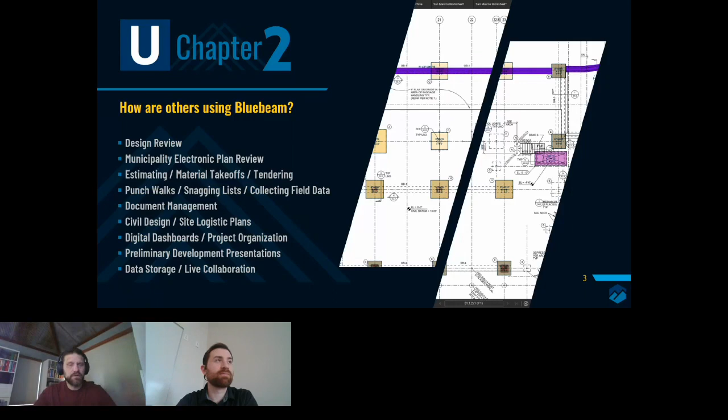To start out, I'm going to start real basic, and then I'm going to show you some cool stuff here. I've just got a floor plan open. A couple of the things that I like to point out in my training are the preferences. When we go into the general section, I always tell my users to enter their first and last name in the user field, because this is going to show up in the markups list with you as the author of those markups. It's nice to know who's doing which markups, especially in a collaborative workflow. It also shows up in dynamic stamps, so the stamp might be built so that when you place it, it actually puts your username and the date that you placed it. That's one thing I like to point out to people.

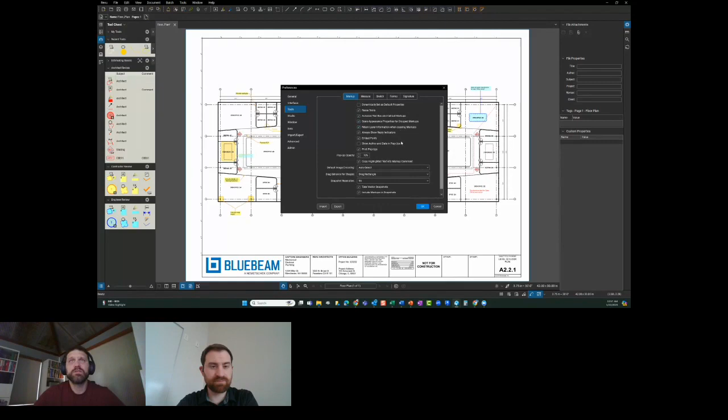Another one in the tools section, markups at the top. The third one down says auto size text box and call out markups. I turn this on with the checkbox. What this does is when you make a text box, typically it's too big, you type your text, and then have to resize it when done. This will actually resize it automatically, so you save a click and a drag every single time you place a note. I'll show you that when we get to the markup tools. I'm going to click OK.

We're going to zoom into the upper corner and show you a couple of the markup tools, starting with the text box. You guys have all done this, I know this is review for a lot of you. Click and drag, it's going to flash asking you to type in your text. I get pretty creative with mine.

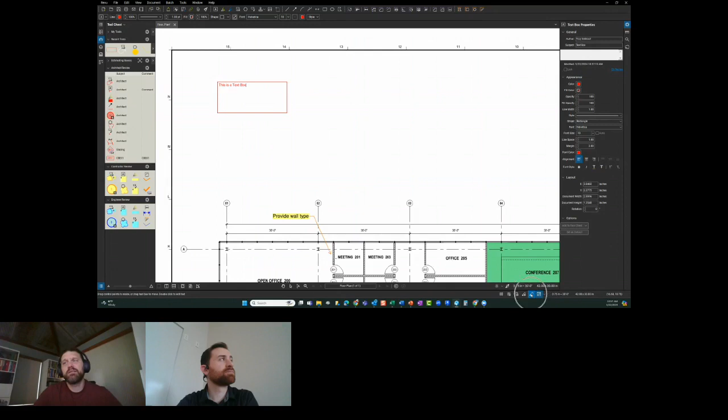What's going to happen when I click out of here, a couple things. It's going to shrink the box automatically to fit the text because of that preference I updated. Also, because on the status bar I have my reuse markup tool turned on, it's going to start my next text box. So you can see both of those happened. I'm going to hit escape to cancel that command, and now you can see that box automatically shrunk to fit the text.

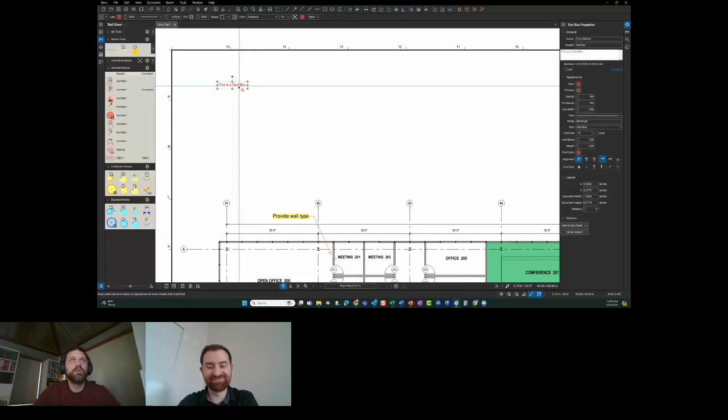Now when you open Bluebeam for the first time and do your text box, it actually doesn't have a box. I don't know why they built it that way, I think they thought it'd be funny to deliver half of what the tool's called. So all you need to do is select it, come into the properties, the little gearbox, check your line width and bump that up to 1 or whatever thickness you want so you can see that box. Now go to the bottom of the properties and click on set as default so that from now on you'll have that box on your text box.

So any of the markup tools, measurement tools, any of that, you can change what it looks like here in the properties and set that as your default. It just works that way every time, you don't have to update your markups every single time.

Couple tips here. If I select this and hold down my control key, I can click and drag and it'll make a copy wherever I drop that. So control key makes those copies. Another tip - I used to switch over to the arrow here to be able to draw a window and select things. You actually don't have to do that. If you hold down your right mouse button instead of your left, it'll draw that selection window, just like AutoCAD.

If you go left to right, you'll get everything that's inside of that box. So if you look carefully, I'm only going to get 3 of these in the middle. If I go from the right to the left, it's going to grab whatever I cross. So you don't have to switch over to that arrow.

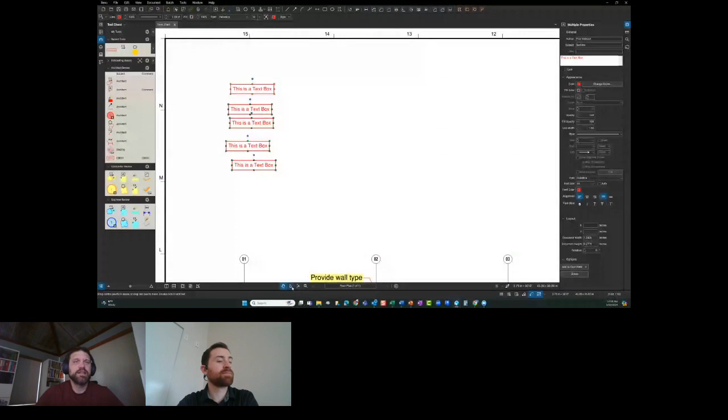Once I have those selected, I can right click, go to alignment, and align left, center, right. I'm going to go left. And then also I can come into alignment and distribute vertically. So I can start to clean these up, make things look nice for a presentation, or maybe you have an engineer that's particular about how things are laid out - I've worked with plenty of those. You can make it nice and clean. So that's our text box.

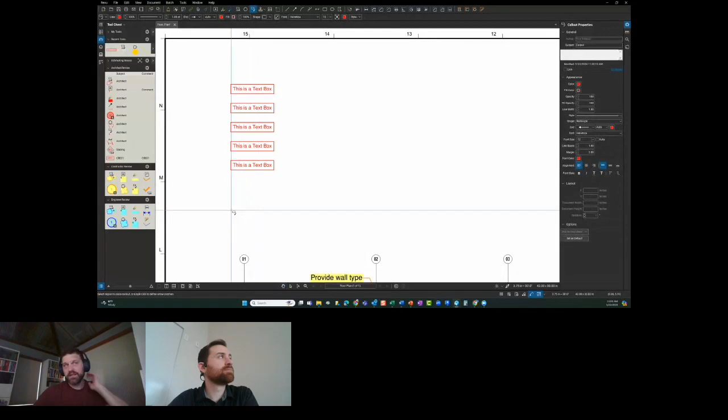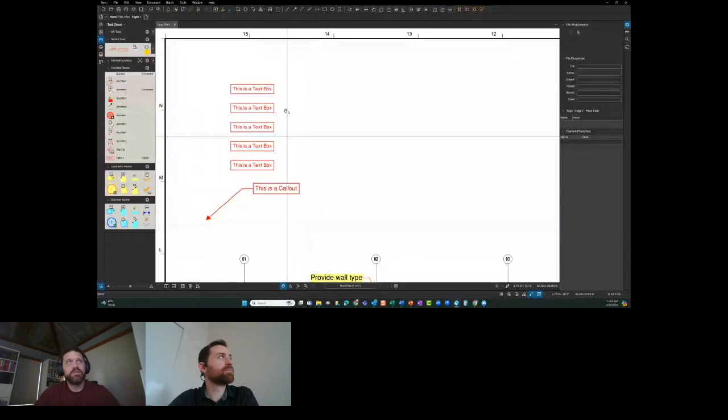Next one, I'm going to do the call out. This is just a checkbox or a text box with an arrow. So you're going to point to something, and then the second click is where you want your note. Again, type in your note. And when I click off of it, it's going to shrink that box again and start a new one. I'm going to hit escape again, so you can see how we're saving time with that box shrinking automatically.

With the call out, I always like to use these instead of text boxes and separate arrows because they stay connected. If I want this note to point to several different places, I just right click, add a leader. I can add as many as I want and they stay connected. So I don't have to draw a separate arrow and try to grab onto that elbow, line it up, and pray nothing ever moves. Now when you want to remove any of these, you just hold down your shift key and click on the tip of the arrow you want to remove. So it's super simple to add or remove as many as you want.

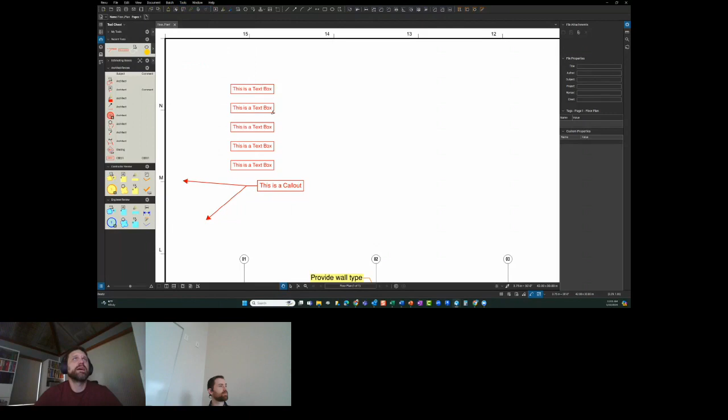Some other ones, the highlight. If I come down here, you'll notice that the highlighter is actually more sophisticated than you would think. When I'm out here in the open, it looks like the tip of a highlighter. As soon as I get close to any text, it changes to a text selector, and I can drag over that and highlight the text that way.

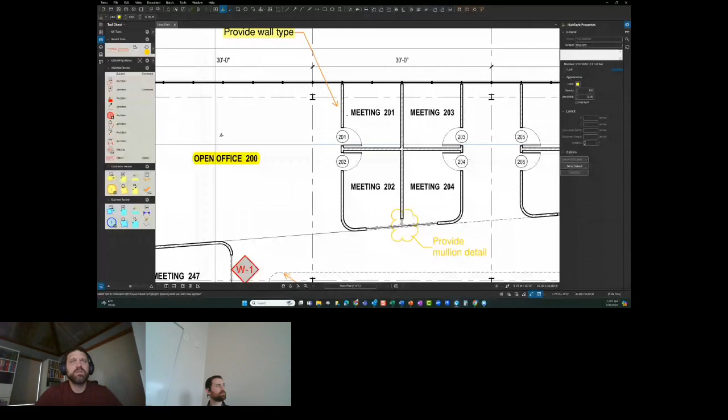Works great, fantastic. What you're going to find, though, is once in a while, in a congested drawing, when you try to highlight something, it will blink and highlight everything except the one you actually tried to highlight. It's going to happen. Just come up here, click undo, pretend it never happened. Go back to that spot again.

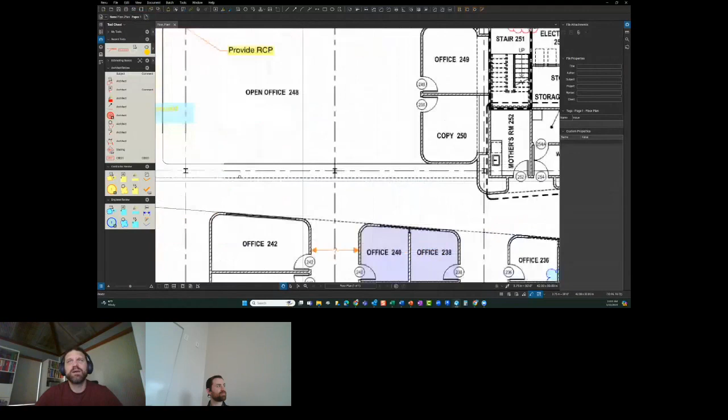And this time when you go to highlight, when it tries to select that text, hold down your control key and turn it back into a highlighter, then you can draw over top of it. I'm going to hold my control and shift key at the same time, because then I can actually draw a straight line nice and clean over that door tag.

Now, one of these we drew over top of it, one of these we actually selected the text. It's going to give us two different results in our markups list. If I look at the one that we drew over top of it, and I look at the comments, there's nothing in there. But if I look at the one where I actually selected the text to highlight it, the text shows up in the comments.

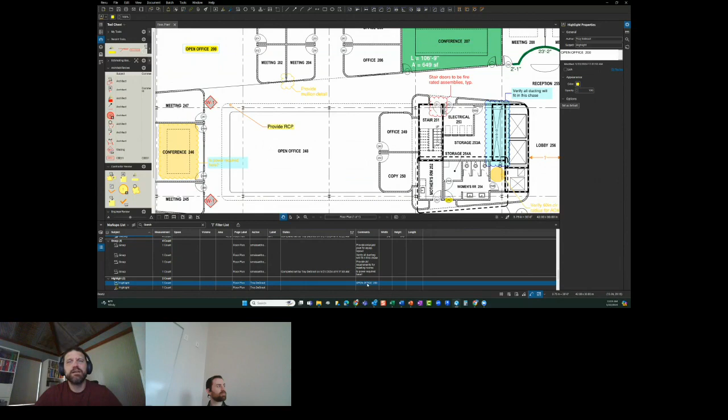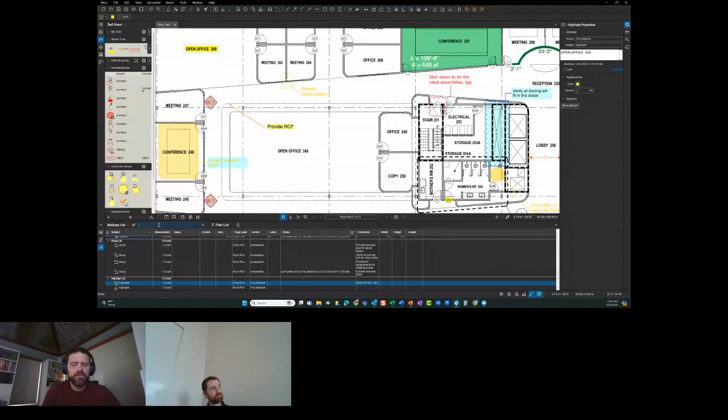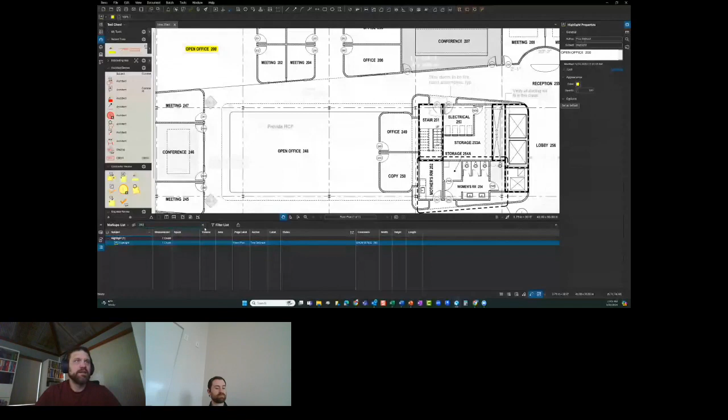Now, why is this important? If you're looking through a code book or a specification or drawings or whatever, if you use the highlighter this way to select the text of an important section, your markups list is searchable. So I can come up here to the search panel and look for 200, and it's going to narrow all of the markups in my markups list to show the one that contains 200. It's almost like bookmarks. You can highlight the important things and then search and find those in your markups list. So all kinds of different workflows you could use with that.

Okay, what are some others? The arc tool. A lot of people hate this one, including me for a long time. When you click on that and try to draw your arc, it gives you this really strange quarter oval, which is pretty much worthless unless you're drawing cars from the 40s. Then it's fantastic. The trick with this one: if you hold your shift key down and click and drag, it'll give you a quarter circle.

So that's a little bit better. But my favorite, if you hold your alt key down, you'll actually be able to draw a 3-point arc like we were all hoping. So, Alt key, you can draw a 3-point arc.

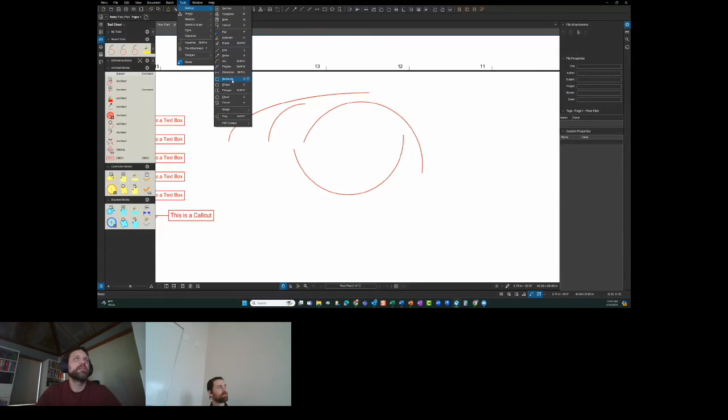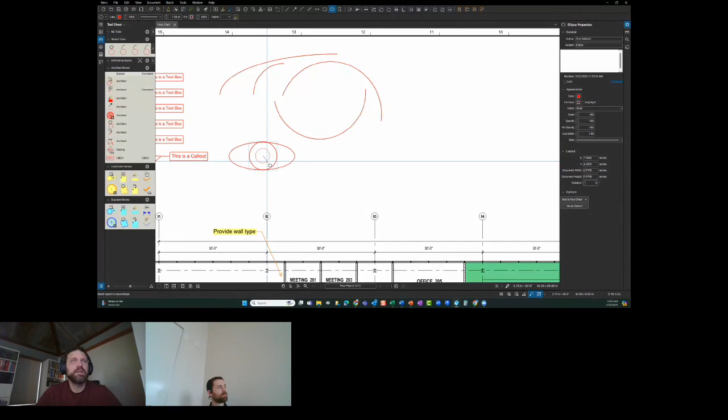I go back to here. Let's see, the ellipse. Some tricks on this one too. When you click and drag, you're going to get this oval. If I hold my shift key down, I can get a circle, corner to corner. And again, if I hold my Alt key, I can get a circle from the radius instead of corner to corner. So that's a nice one to learn as well.

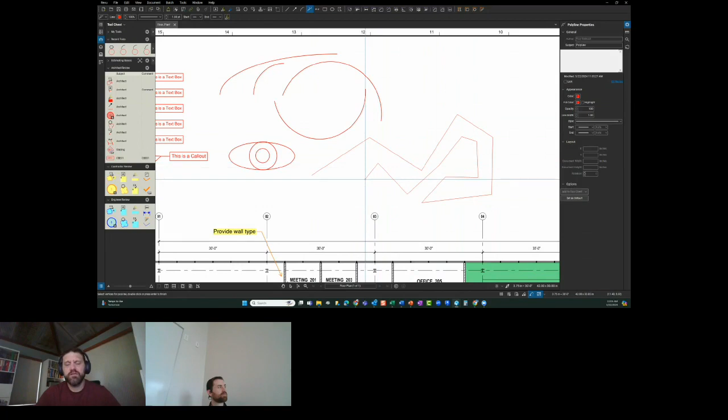What else do we want to show here? The polyline. This one's pretty simple. Again, it's just a continuous line with different points. So we pick. If at any point you don't like the path you're headed down, you just hit backspace on your keyboard and it'll back up. You don't have to delete and start over, just back up and continue on again. Double click when you're done.

If things change, you can select it afterwards, hold your shift key and click to add a grip anywhere in a line segment. So you can adjust that shape, or hold your shift key to click on the grip and remove it. You can also right click on a line segment and convert to arc. So within that same line, you can adjust what that looks like in a lot of different ways.

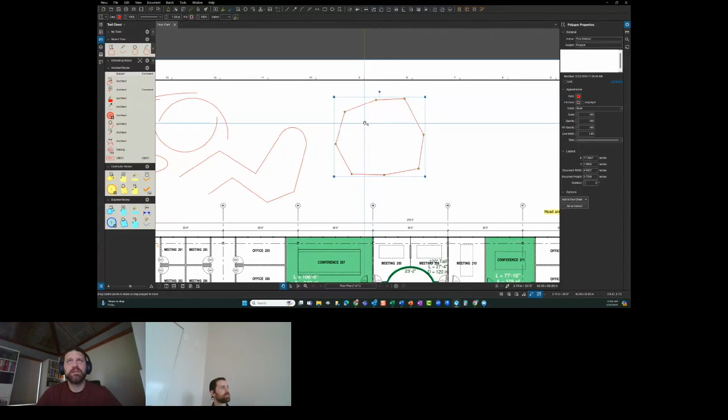Same thing with the polygon. When you're clicking on this one, click. All of the backspace tips still work with that one. Double click when you're done. And the same thing here: if you click on it, hold your shift key down, you can add grips, move those around, remove grips with your shift key again, convert to arc. There's a right click.

And a trick I want to show you here is that when you draw a closed shape, you can go into your properties over here and put a fill color in there. So I can put yellow. Covers up the whole thing.

You don't have to mess around with the fill opacity. A lot of people come in here and make it 50% or something like that to lighten that up so you can see through it. You don't have to do that. Leave that dark and bold. Just click the highlight check mark.

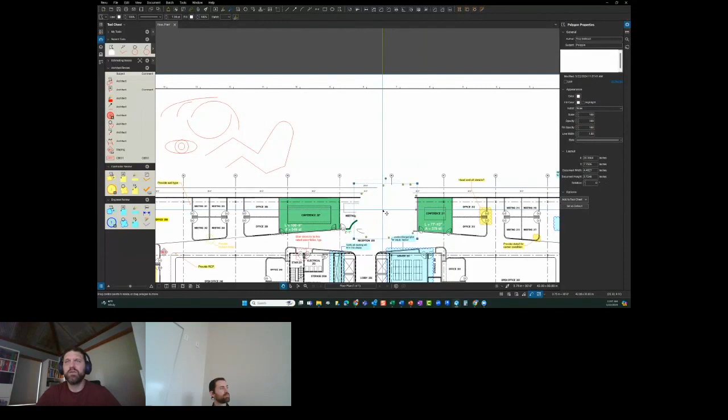That'll make it see-through. Now, some of you take advantage of this tool and go in there and make white markups so you can clean up the drawings and hide things. Don't do that. You're not fooling anybody. There's still a markup in the markups list, and guess what? It has your name on it. Don't be that person.

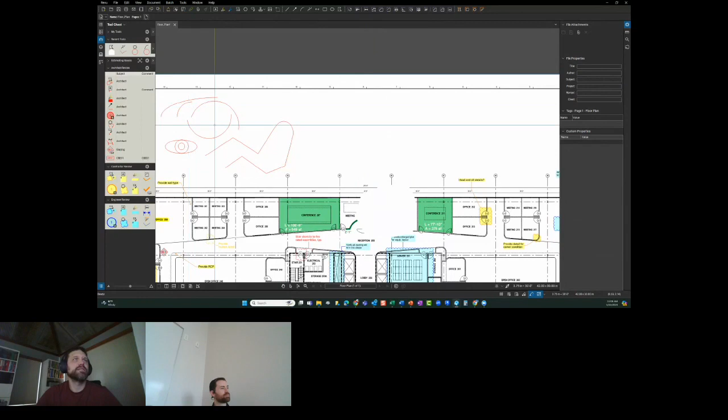Close this. I'll show you how to actually do that. You're going to go up to Edit, PDF Content, Erase Content. So if I want to make this a 2-story building, I'm just going to zoom in on my stairs, click and drag a window here, and wipe out those stairs.

Now those are completely gone. There's nothing in the markups list tracking that. It's completely erased. Once you save this, you can't undo it and bring it back.

Another one in here, Edit, PDF Content, Cut Content. So if you want to move something, let's say this break room table and countertop, I can cut that. It'll put it on my clipboard and then I can paste it anywhere I want. It comes in like a markup, so I can move it.

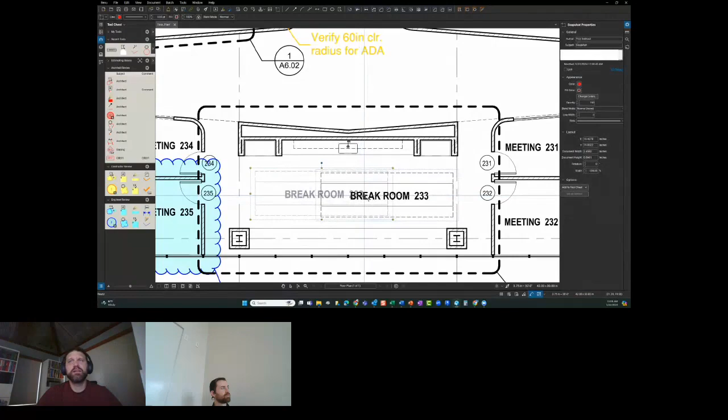And then a lot of times when I do that, I quickly right click and flatten it so nobody knows I did that. Okay, we're editing PDFs here. So outside of this room, don't tell anybody I showed you how to do that. There's people that sign drawings that don't want you to know that.

Markup tool, I think we're good there. Let's jump into some measurements.

So I like to get mine over on the measurement panel over here. And I should back up a second. What I'm showing you here, I'm actually in the Review Advanced Profile, so it spreads out some tools on the left and right. I like that because I can have my tool chest open over here and my properties and my measurements over here because I'm in both of those all the time.

Okay, so the first thing I need to do is calibrate. It's going to tell us to pick 2 points of a known dimension, usually the bigger the better. I'm just going to go with the 30 feet here. And you'll notice I'm snapping to the line work in the PDF. That's going to be down here with our snap to content on the status bar. I'm going to snap to that, click, snap over here.

A lot of times I like to hold my shift key so I don't accidentally have a skewed line. That would throw off all our measurements. Click there, and it's telling us that this random distance on the piece of paper is 30 feet. It's correct. I'm going to apply that scale. Now I can get any measurement I want. I can come in here, snapping to the face of those walls, holding my shift key to get a straight line. I can measure these rooms where I don't have measurements.

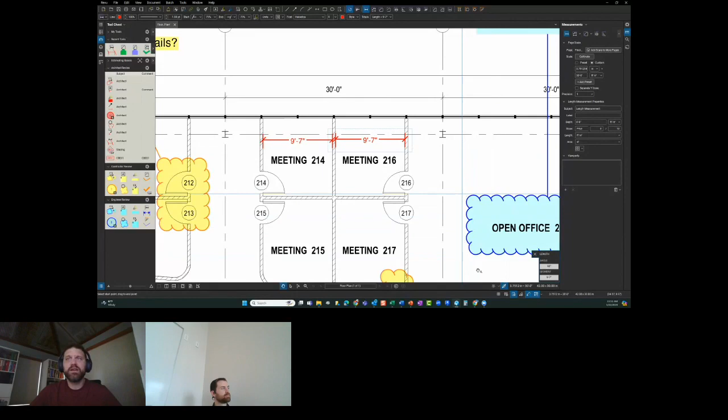Sometimes I've noticed that when I do an area measurement, if I have my line weights turned on, it'll actually measure to the face of that thick line instead of the line that's actually the center of that, if that makes any sense. So instead of measuring to this line, it's measuring to the thickness of it. So it can give you inaccurate measurements.

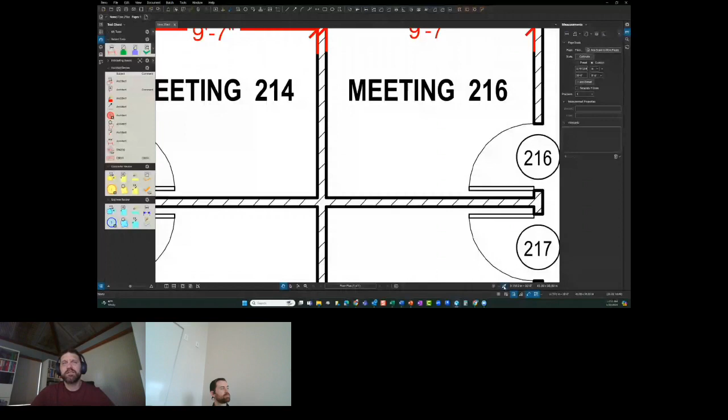So anytime I'm doing measurements, I typically turn the line weights off. Actually, most of the time I have the line weights off. It's just easier to look at and easier to snap to things.

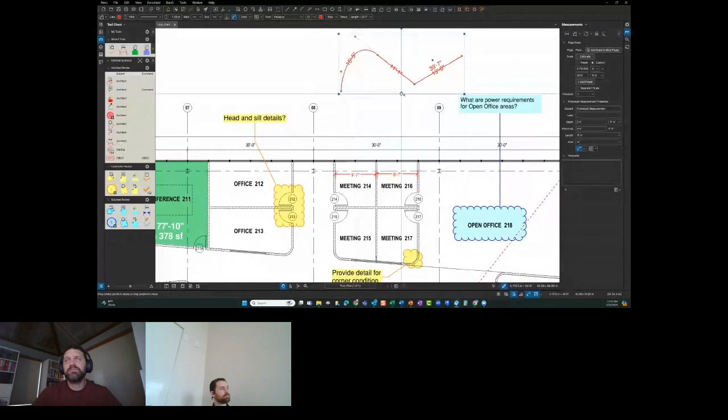Okay, pretty simple. We're going to do an area measurement real quick. There's a couple different ways you can do this one. Zoom in down here, first one, this one's a rectangle. I'm just going to snap in the corner up here, click and drag to the bottom corner. Gives me my area measurement.

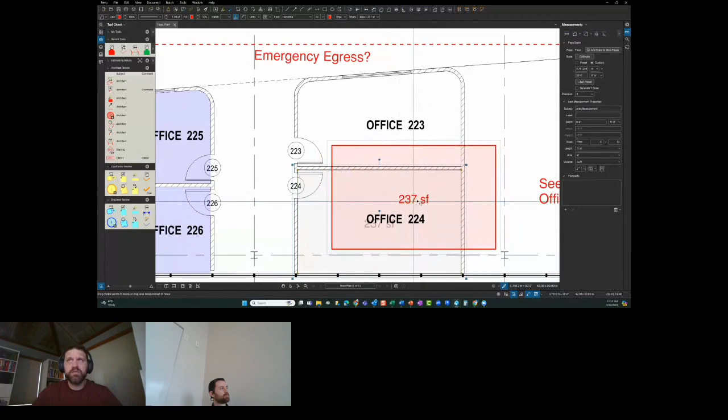Now typically all the CAD software we use is fighting for the center of the room, so our measurement lands on top of the Office 224 text. If you select your markup and hold your shift key... well, let me show you first what happens. If you try to move that text, it moves the whole thing. So I'm going to hit escape before it actually moves. And the trick here is to hold your shift key, and then you can move that text wherever you want.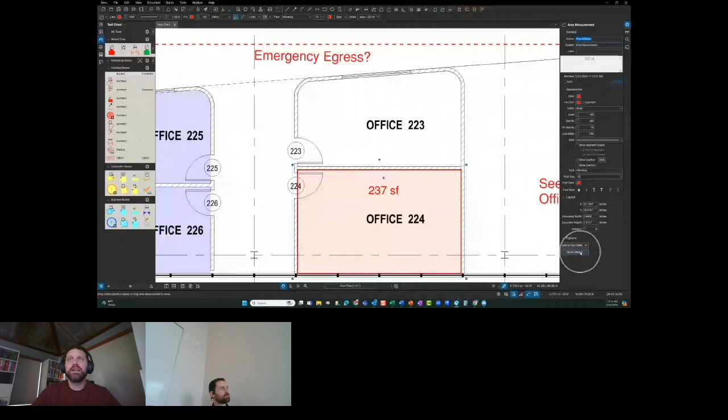I also updated my default area measurement to have this pink infill. I just went to the properties of that markup, put a fill color of red, and the fill opacity to 10%, and then I clicked on set as default. The reason I did that is if I go home for the day and come back tomorrow, as soon as I open this I know which rooms I finished and which ones I haven't. If I don't have that in here, it's a little harder to see which rooms I've measured. So that's why I have that default in here.

Another way to do that, instead of click and drag, we have this odd shaped room. We're going to click, instead of click and drag we're going to pick. I'm selecting the end of the straight lines here. I'm going to skip over that rounded corner. Pick, and down here I'm going to double click. And then just like our other tools, I'm going to right click on this line segment here, convert to arc.

And sometimes when you convert to arc, it comes in inverted. I've had the best luck when I go clockwise. Sometimes it still happens, but when I create the shape going clockwise, a lot of times it's going to convert out instead of in. So that's another way to do that.

Another one I like to show is dynamic fill, which is going to be on the far right side. It looks like a paint bucket here. Dynamic fill is one of my favorites.

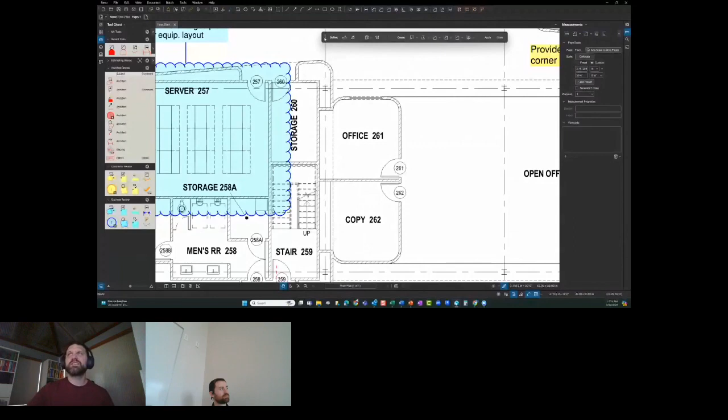I used to work with a guy named Phil, and he wasn't dynamic in the least until I said dynamic fill, and then he'd pump his fist and get all excited. So that's my joke about dynamic fill.

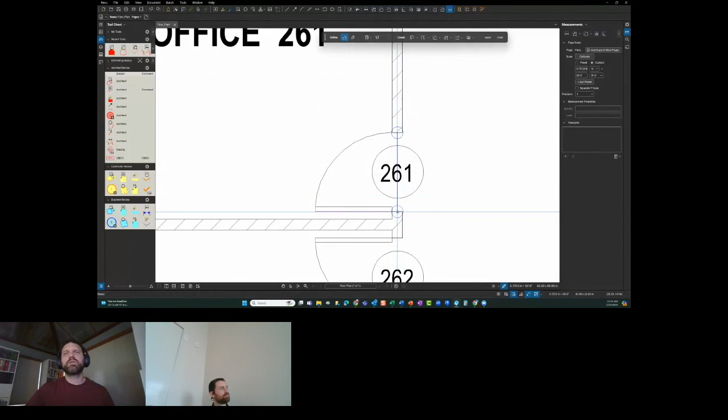So this one is used for odd shaped rooms like this one, and I need a continuous line around the perimeter of the area I want to measure. Since I have an open door here, I'm going to come up here and add a boundary and draw a line across this door. Then I'm going to select my paint bucket. And then down here in the middle, I'm just going to hold my left mouse button down and swirl and fill up that room, bleeding through that door and the door tag.

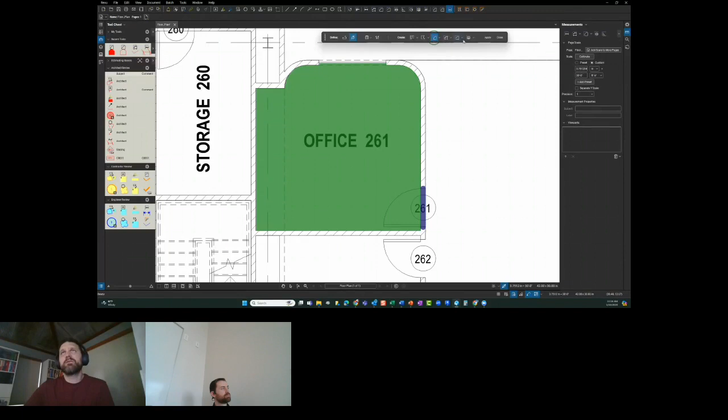And when I'm done, I need to tell it what I want it to report, so I need to click on area. If I don't select what I want it to report, it won't report anything - it'll just cancel and you'll think it didn't work. It's because you didn't tell it what to tell you. Once I select that, I'm going to hit apply, and you can see it'll do a nice job going around all those curves and give us that area.

Okay, any questions about the basic stuff? Everybody doing okay?

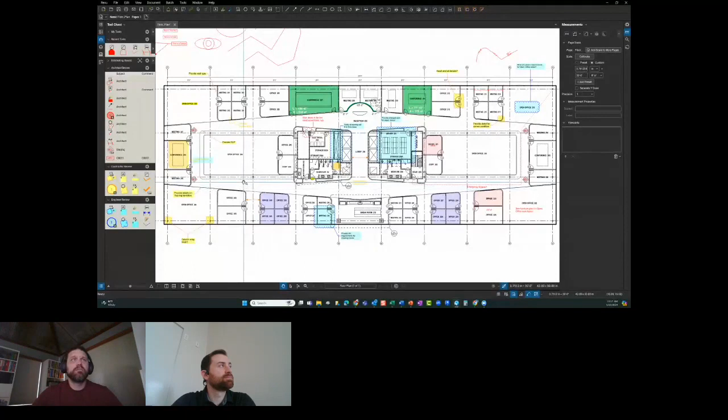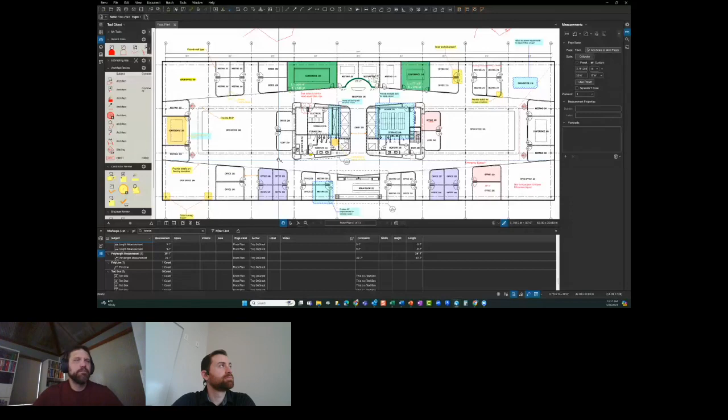But the part I want to show you is statuses. If you're working on a design review, whether in a studio session where you're all opening the same PDF at the same time and marking it up, or just opening a drawing, you can change the status of your markups. So these are all my markups. I'm going to go to this one here - flooring was done by Jay Popeil. And once I apply that change to my CAD file or Revit model...

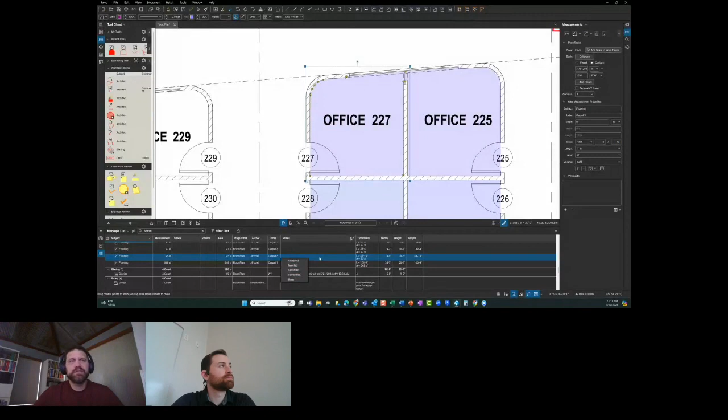I can come down here to the status, and you can create custom statuses so that when I mark this completed, it mimics exactly what I would do in a paper workflow when I color over it with a yellow highlighter, indicating that I've completed that markup. In here it'll say that Troy DeGroat marked this completed, and the date and time that I did that.

Now when the person that marked it up back-checks it, they would typically scribble over it with a green marker. So I can double click in here as that person and mark this accepted - and we can name those whatever you want. Just like the green highlighter, it highlights it green and marks it accepted by whoever, with the date and time. So you're tracking who finished the markup and who didn't, or whatever the case might be.

Another status might be rejected - you can have it change to orange or whatever you want. Or canceled - I changed this one so if that markup is canceled, like it doesn't apply anymore, it changes to white and basically disappears. But we didn't delete it; we still have a record of that markup. So at any point we can still pull that forward and make it visible again. That's how statuses can be used in that workflow.

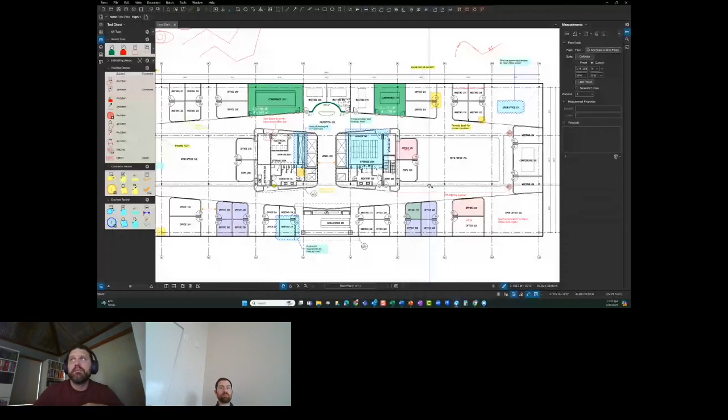If you're doing this in a studio session - studio is the cloud portion of Bluebeam - with studio sessions you can upload PDFs only, and you can invite up to 500 people to collaborate on that same PDF. Everybody opens up the exact same PDF at the same time and marks it up together. As fast as you place a markup, it shows up on my screen, and I can see that you did that.

So back when I was doing design, everything was paper, of course. I had an EIT that was marking up all the sizes and things like that - they were running the calcs. And the engineer of record was also marking it up. A lot of times they'd give me their big sheets of paper and the markups would contradict, so I'd have to run around and interview them to make sure whose markup was right, whose was wrong. A lot of times it ended up being a third markup with their thoughts combined. It was just a mess.

If they had done that in a studio session, they could have seen each other's markups and had a discussion and updated that in there. I could have been in the PDF at the same time, applying those markups to the models as fast as they were marking them up. Instead, I'd wait till 2 o'clock when they were done and end up working through the night because the drawings are due in the morning, right? So we can eliminate that with all of us working together in a studio session.

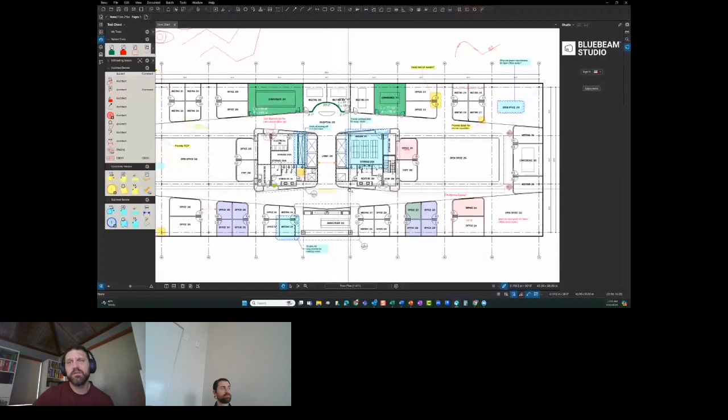Next one I want to show you is sets. I'm going to jump into a different Bluebeam here, and this one has a multi-page document. If I look at my thumbnails, I'm just going to fly through this workflow - all my thumbnails are pretty screwed up. I've got 3 number 2s in here.

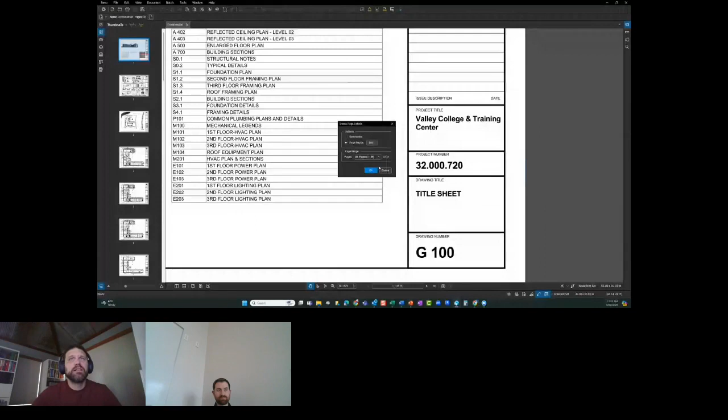I can fix that very quickly just by clicking on Create Page Labels, selecting a region, zooming in and drawing a box around that drawing number. I click OK, and it looks at that box on every single sheet. I say All Pages, and in 2 seconds it updated all of my page labels to read the correct page number.

Next thing I'm going to do is go into my batch link and create some hyperlinks. I'm going to add open files. I can point to folders and subfolders as well if I want to, but I'm just going to do this one. I'm going to use my page label since I already updated that, and click Generate.

Now, you guys know that none of the section cuts, elevation tags, or notes are ever going to reference back to the cover sheet. So I actually changed this search criteria, and I put something that's on every single sheet - in this case, the job number.

Every time Bluebeam finds that job number, it's going to create a hyperlink back to the cover sheet. I want to do that because my sheet index is there - it's like a home base, and I can jump home from every single sheet. I'm going to go ahead and click Run.

It's going to go through all these sheets looking for those page numbers and create hyperlinks. Basically, I'm activating all of my section cuts and plan notes. It just created 164 hyperlinks. Say finish and close, and now you can see that my sheet index is active.

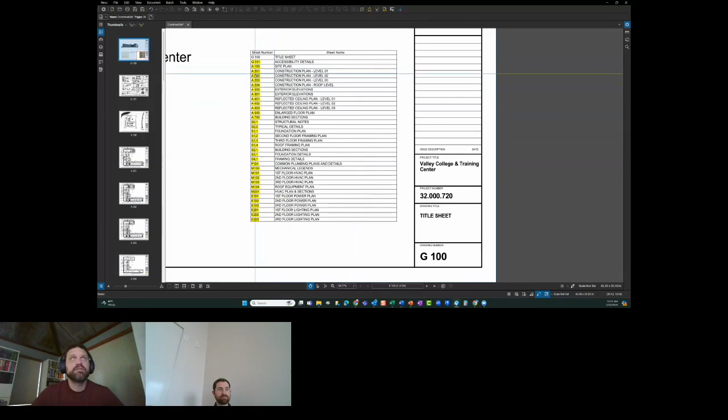I can jump from my first floor plan to a blow-up plan to a section cut. And then I can click on my home button to go back through another sequence of drawings if I want to.

So what happens when you open a 36-page document? The first person in the office is the winner - they open it up, they own it. Everybody else gets a read-only.

So what do you do? You create your own - you save as, you put it on your desktop, you mark it up. Pretty soon, 16 people have 16 versions of the drawings. A revision comes out, nobody knows what's going on, and you have markups spread out all over the world.

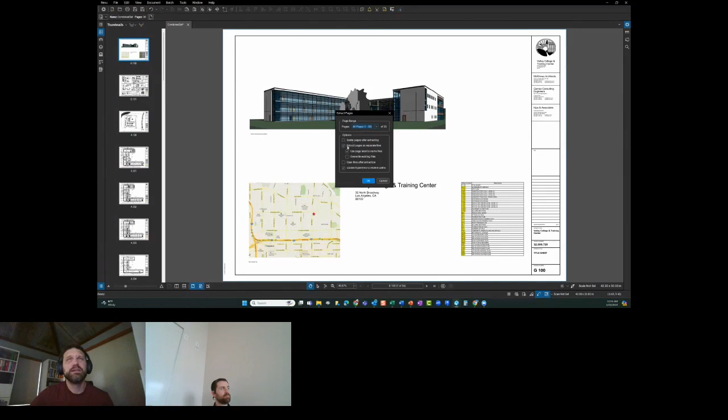So what I like to do is actually create a set - and I don't like that Bluebeam calls it a set, because I feel like this is already a set. But what we're going to do is right-click, extract pages. I'm going to select all pages. I want to extract them all to separate PDF files and use the page label to name that file.

And I want to make sure that I keep the hyperlinks' relative paths. I'm going to click OK, and it's going to ask me where to save that.

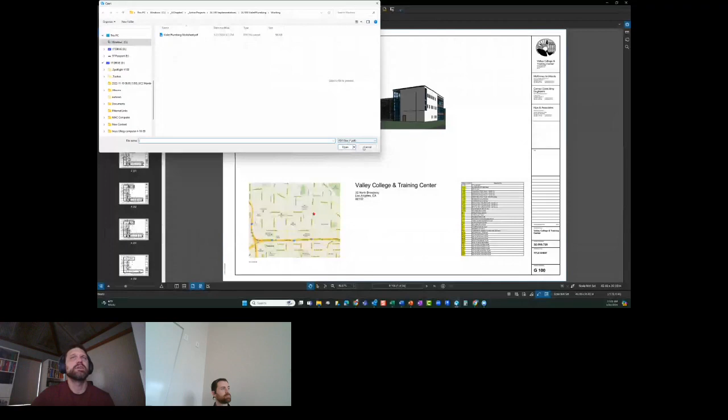And if I look at that folder now - let's cancel that. Another trick here: if I right-click on the tab, I can go to Explore Document Folder, and it'll bring me right to where that one lives. So I can look at - let's see, where did I put that - this one here. So I put all those individual files in here.

Okay, now we're going to pull them back together in what Bluebeam calls a set. So I'm going to close this one, go to my sets panel here, and create a new set.

Sets allow you to view a collection of individual sheets as if they're a single document. So I'm going to click OK, and I'm going to point to that folder, and say select folder - and it will load all those. I'm going to click OK.

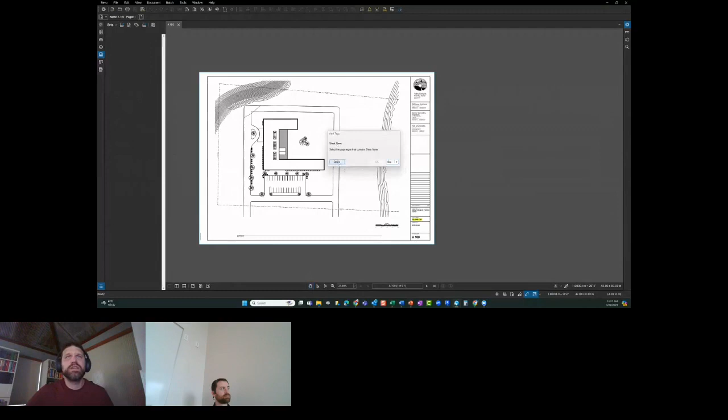And it's going to ask me to create a couple of tags. So for the sheet name, I'm going to select, draw a box here. It's going to ask for the sheet number - grab this here.

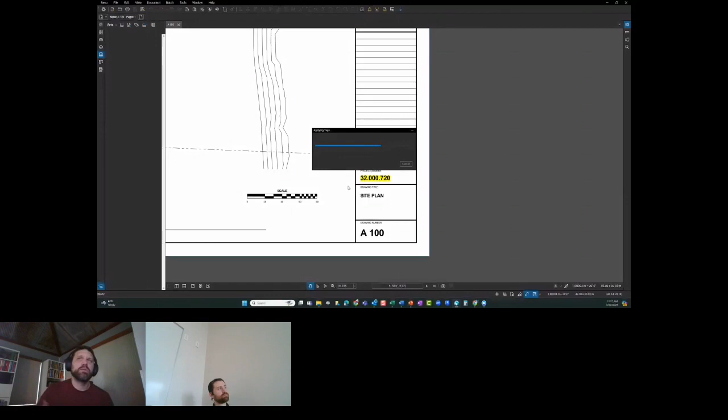And what this is doing - Bluebeam calls it a set, I prefer to call it a binder, it's like a three-ring binder - is pulled all of those individual pages into that binder, and we can view it just like we did before when it was a single document.

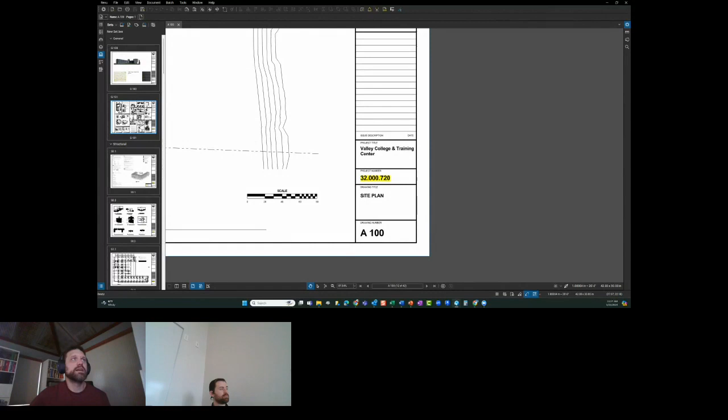Except now, when I click on this drawing here, it opens up that one sheet and leaves the rest open to the rest of my team. When I switch over to another sheet, it closes that one, making it available to everyone else and opening up that one sheet. So my team can bounce around and look at different drawings within this same binder, as opposed to when it was one PDF. It also loads faster.

Maybe the best thing about the binder is that all of my users are opening up the BPX file, the set file, and so only one person needs to manage this. When a revision comes out, one person just comes in here to batch slip sheet - current files as the open set, the revised files, I'm going to point to a folder.

I'm going to go A201, match 203, 300, match. Now I have some options here.

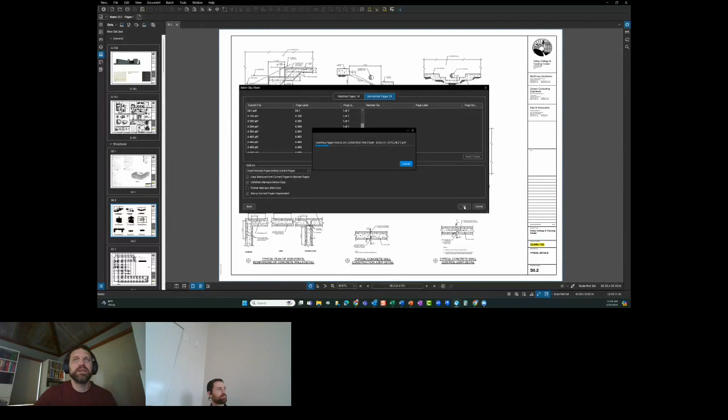So it's going to do all that at the same time. I'll click OK. It's going to slip those pages in, stamp the old one superseded, copy the markups forward, and put the new one on top.

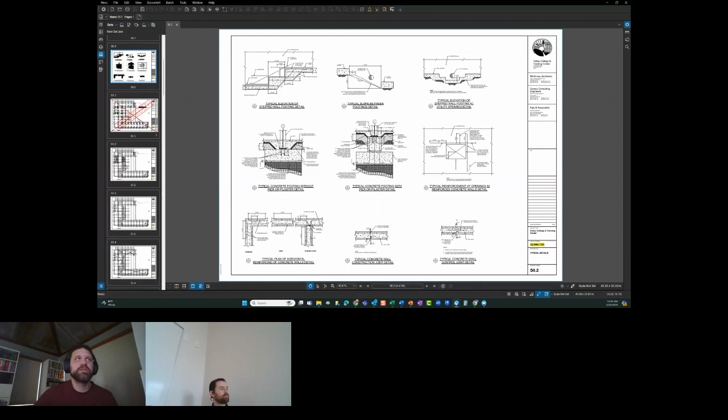Now over in my binder, you can see behind this one there's an arrow leading back to the previous version of this drawing. It puts that tiny little superseded stamp over top of it, so be careful you don't miss that. But the most current is on top. All the hyperlinks will link to the most current drawings all the time when you slip sheet.

So when my team is working in this binder, one person updates the drawing set and slides in all the revised sheets. Everybody just comes in the morning, opens up the binder, and they have the most current set of drawings all the time.

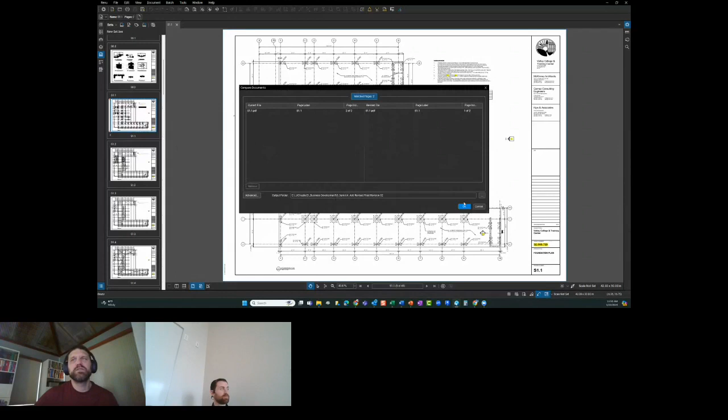Another thing you can do is right click, compare documents. It'll line those two up and cloud everything that's different between them. So you can see we've got some changes here and in the schedule.

Any questions on sets? You guys are quiet today. I think last time the questions took over the show. Yeah, they're being real quiet. It's okay, hopefully they're taking notes, or I'm not boring them. All right, nobody's perfect, so as long as they're not sleeping yet.

That's good. The next one I want to go over is punch walks, so collecting field data, things like that. In this example, I created a tool chest for all the different disciplines. You'll notice yellow is electrical, orange is mechanical, dark red is structure, blue is plumbing, so you can look at this and know exactly who the markups are for.

Because if you're a mechanical contractor, you know all the orange ones are yours. I can also sort and filter my list to show me only the markups for mechanical. I've got layers set up so I can turn those on and off as well. But if I want to look at just the structural, I can do that. It'll filter my list so it only shows structural in the list, and only shows the structural up top.

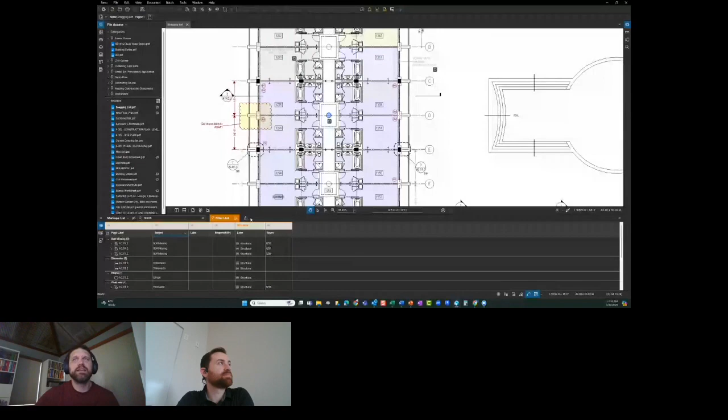So if I'm the general contractor, I can filter this list, run a report, and give that to my structural subcontractor. Then switch it over, turn off the structural, turn it to mechanical, run a report, give that to my mechanical contractor, and so on.

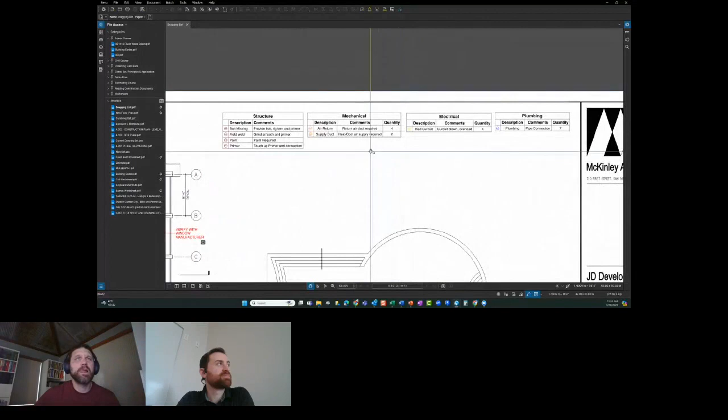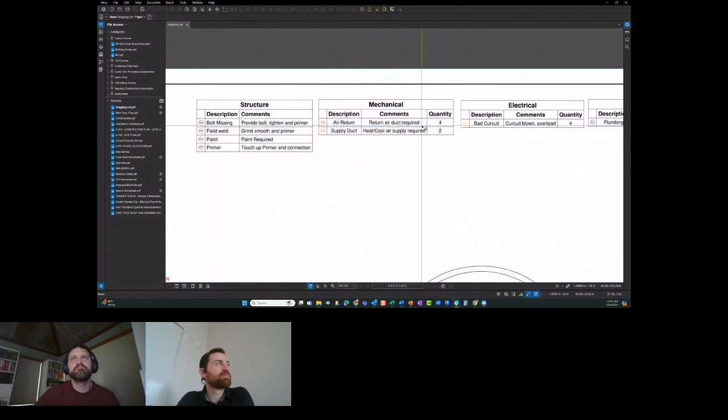I also set these up so that I have legends that are only reporting the punch symbols that were placed. I created punch symbols that had a description and comments on how to fix those. On this one, I actually put the quantities in as well, so they know exactly how many return air ducts are required, what equipment to bring, what tools, what products to bring in before they get there.

I also created spaces for each room, so if I sort this by space, it's going to actually sort all of my markups by room name. So room 1254 is showing me all the markups that are in that room. I can just go room by room and know exactly what I need to do, and exactly where to deliver those products.

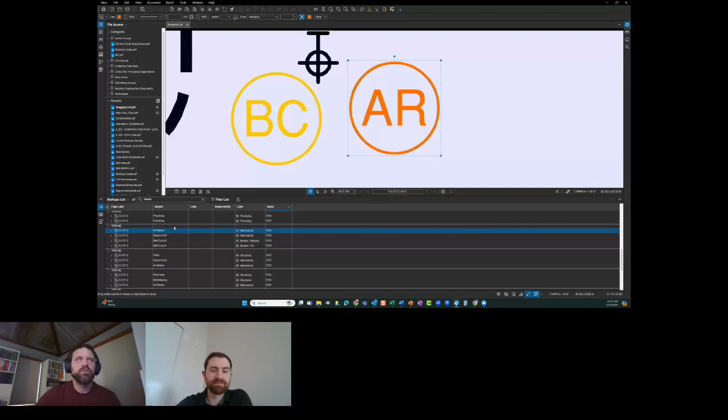The cabinet's broken, I need to go to room 1254 to fix that cabinet. So it helps in that whole process of collecting field data, and then what you do with it afterwards. You can also attach images to your markups. So I've got this 'verify with window manufacturer' cloud here, and when I click on this little lens, it's going to open up my picture that I took on site that I attached to that markup. So I've apparently got some structural glass here that's going to hold up the deck above.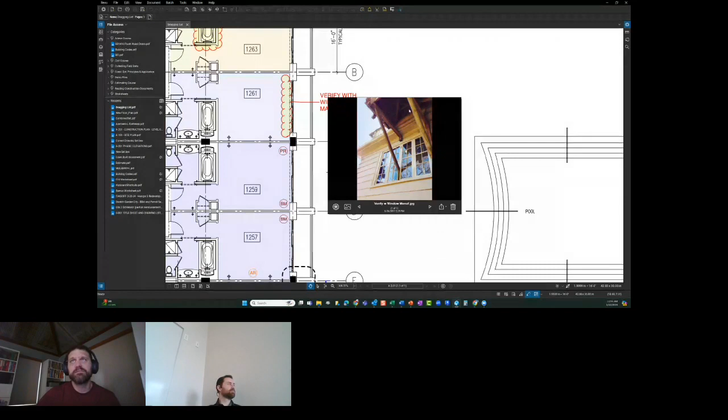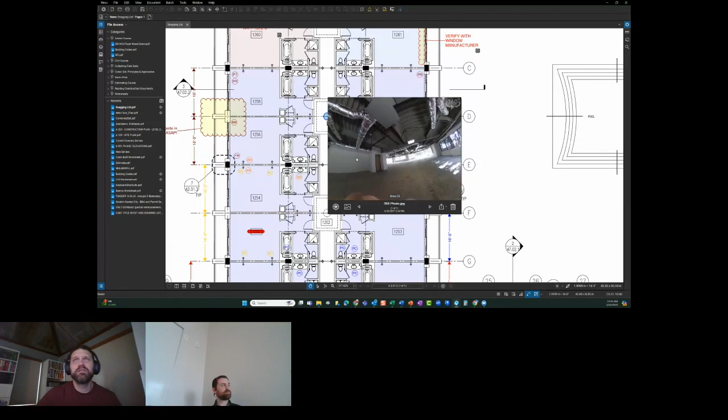We can also attach 360-degree images. So here you're collecting that field data. Maybe you're looking for the ductwork, all the flex tubes and things, and then you get home and you're wondering about the fire sprinkler system. Well, you got that in here too that you captured. You didn't know you needed to, but you did. So you can collect that stuff in here as well.

Okay, so that's my punch. I'm going to jump out of that one. Punch, or collecting field data, whatever you want to refer to that as.

And the last one, I'm going to jump in here for some estimating. Estimating is by far the most popular thing I get asked to build custom tools for. I've built tools for probably 15 different concrete contractors, and they're different every time. So I don't sell tools off the shelf because they're different. I learn the workflows of the company and then build the tools to fit.

So this particular company, I delivered some tools this morning. They have everything from concrete foundations to masonry, lintels, wood framing, roofing, doors. They've got tools for absolutely everything. If you look at their tool sets, they're all organized here.

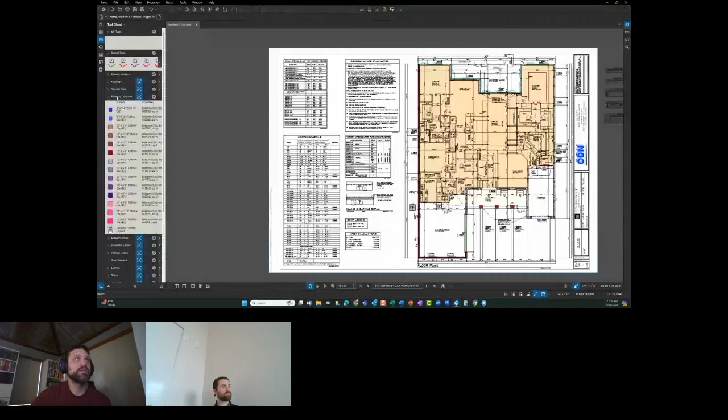So basically they can start at the top of the list, lay out their footings, lay out their slabs, masonry columns. These masonry columns actually tell you how many blocks you need and how much concrete you need to fill it based on how tall it is.

Masonry walls, you trace these, you trace the walls on the plan. The tools are built for certain heights, so it'll tell you how many blocks you need to fill that, to cover those walls.

Lintels, precast lintels, ceiling drywall, subfloor, exterior sheathing, sheetrock, all kinds of things in here.

Lumber, the wood wall lumber - this particular tool, you just trace the wall here, and in the columns down below, we've got a whole ton of custom columns with all the information.

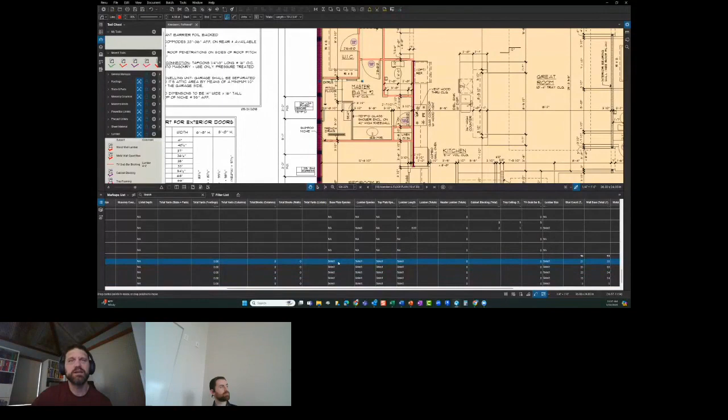So in here, I can select that wall and come in. Where's my markup? Let's select it again. I can select that markup, and then I've got my base plate species, which could be different each time. It says select, and I can come in here and pick whatever it is.

And then I've also got my stud lumber species, top plate species. I can tell it the lumber length if I want to. Over here, I'm going to tell it that I've got 2x6s. And you'll notice here the stud count based on the length of that wall - it's going to tell me how many studs I need. Gives me the linear footage of top and bottom as well.

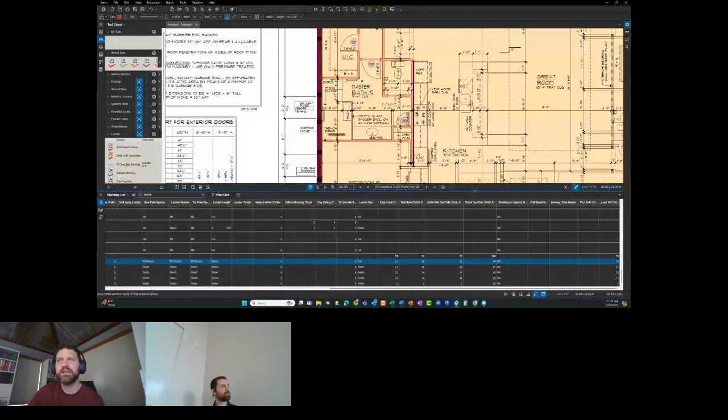If I've got a metal stud wall, it's just going to give me the length of the base and the top are the same. But if it's wood, we got a double top plate, so the number doubles. And then posts and all that stuff. Everything's calculating down here. So basically all you're doing is you're grabbing the right tool, you're coloring between the lines, highlighting things, and all the magic happens down below.

And then I built legends for all these as well. So you can select these, drop these legends on the sheet. Oops, I've got them all over here already. So now you can see the footings - I've got cubic yards, slabs, columns, masonry walls. And I've got legends that you can put directly on the sheet for all the different tools.

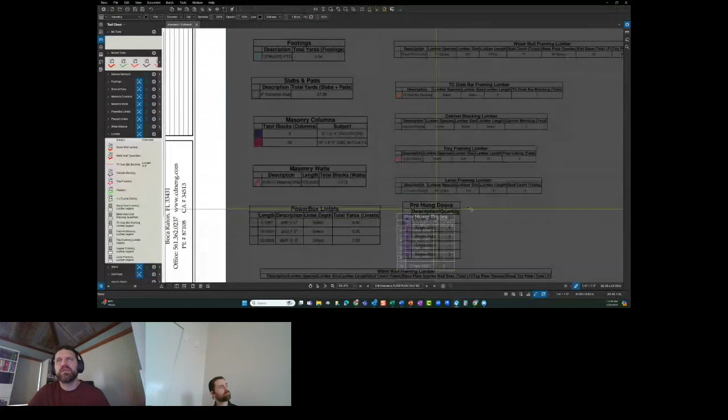Garage doors, pre-hung doors, all of that stuff is in here.

Any questions on that one? Nope, everybody's quiet. Yeah, it looks like they're all good. All right, so we got what, 10 minutes left? Yeah. All right, so that's what I've got for you, but let me see if I can come up with some different stuff. If anybody has any questions on anything, you can ask them anything you want.

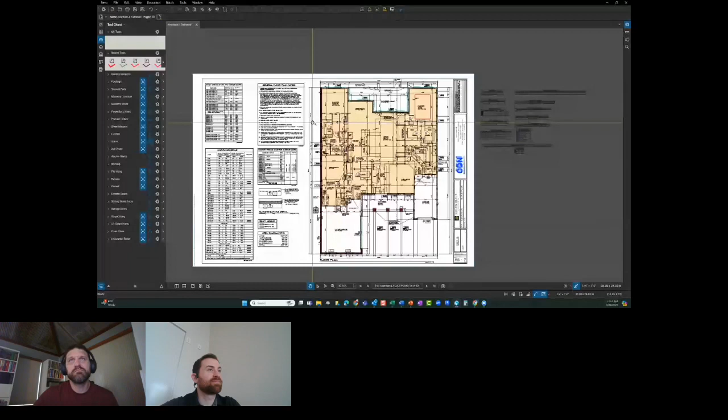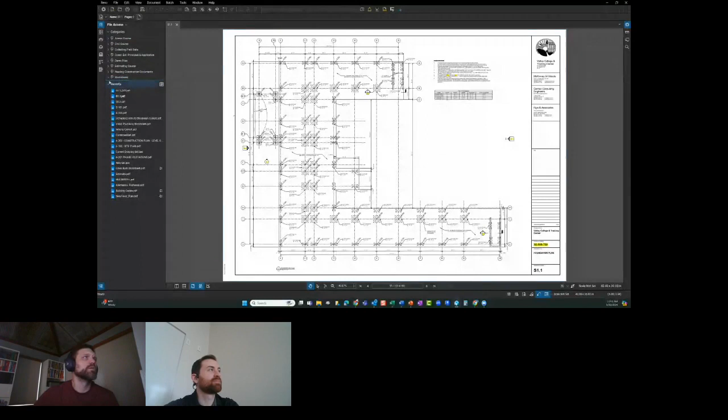Could you cover that hyperlink solution one more time? How you ran through those hyperlinks and had it find all those hyperlinks in your sheet set? The batch hyperlink? Yeah. So that was over here. You want me to run through how to do the batch hyperlink? Yeah, just one more time. Yeah, for sure. So I'm going to come back over here and open up my combined set.

Also, another tip guys, these are all your recent files. It's going to hold the last 20 documents you had open, and then they start falling off. You'll notice I have pins next to some of these - documents I use all the time. I pin them into a category, and the categories are up here. So when I show up to teach my estimating course, all the documents I need are here. When I teach my Bluebeam for admin course, all my files are here. Those are scattered all over my laptop, but I keep them pinned here so I can quickly access them. If you ask me a question about Bluebeam, I'll probably jump up here, go to a specific course, and pick a drawing that I know I could explain whatever that question is. So that's another tip to organize your documents that you come back to all the time.

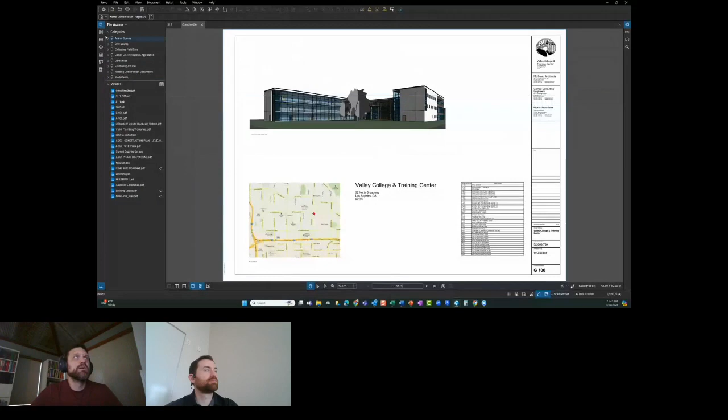So now that I've got this combined set open, the first thing I like to do is always update the page labels. That one's right here at the top of the thumbnails panel. Click on that, select a region. You want to draw a box as big as you can inside of the title block. You don't want to come out here because Bluebeam's going to think that's a 1 or an I. You want to stay inside, but also big enough so that if this becomes 0.3 or Alt 1 or whatever, it still fits in the box. So draw that as big as you can.

We can also type in here a dash - I'll put a space, dash, space - add another region, and draw around the title, again making it as big as you can inside the title block, so if it wraps to 3 lines, it'll still fit. Say okay - all 36 sheets, and boom, they're all updated.

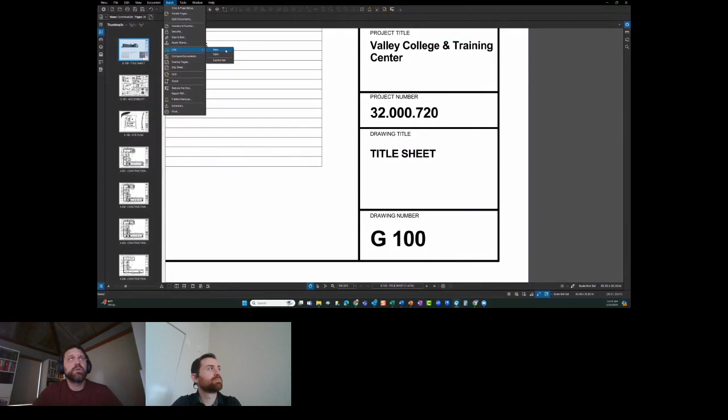Next we went up to batch link new, and you do need the complete version of Revu 21 to do this. Just say link new. I'm going to tell it my open file, then remove that one. Next, I already updated my page labels, so I usually use those, but because I added the title in there, I need to do a page region because all my section cuts don't have the page title, just the page number. So I'm going to select a region and draw a box here again.

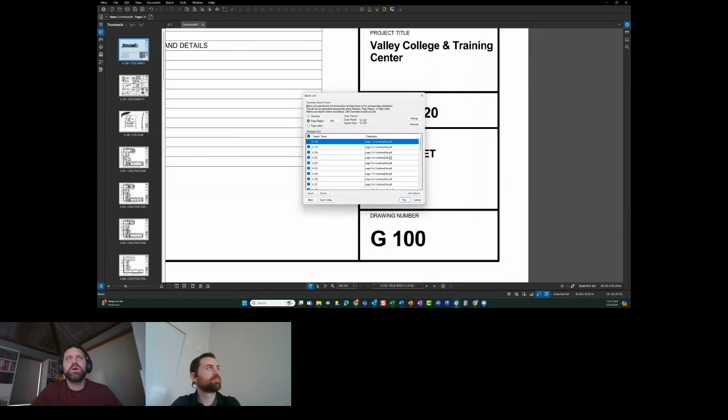Now I'm going to have it search for that. This list basically says every time Bluebeam finds A100, it's going to create a hyperlink to the third page of this document. And the trick I showed - I replaced G100, because it won't be found anywhere, with something that's on every single sheet - job number in this case. Then I'm going to click run. If you don't get all these steps, don't worry - I've got a video on my website that shows all these steps and a tip at the end also. So, 164, finish and close.

And now I've got an active sheet index, and I can click on any of those and it will jump to that page - section cuts, jump back, go through another set. Maybe I want to look at my structural, and so on.

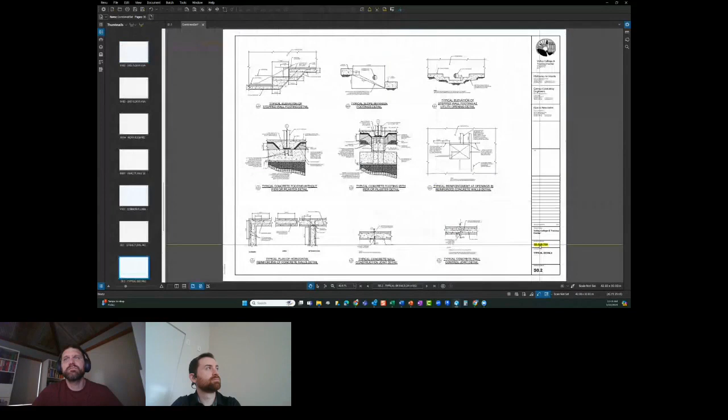Okay. Thank you. Anybody else? Yeah, no problem. No?